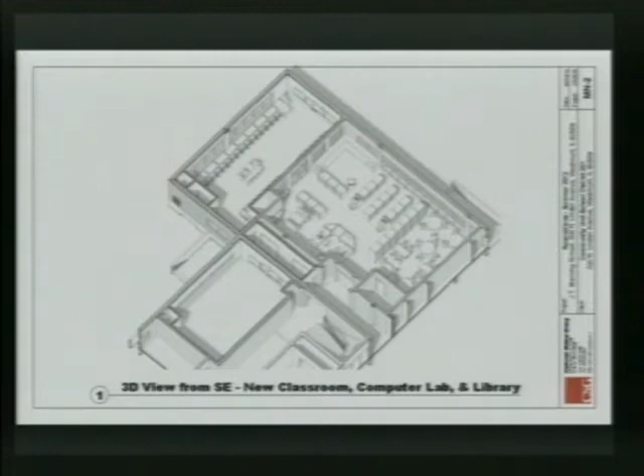I did have a couple of questions about that particular building. In the drawing, the handicap accessible piece, are we touching that? It almost looks like there's access from the library to the outside. That's the existing. So that exterior piece won't be touched?

No. We've actually been working with Mike to bring in some concrete restoration contractors to look at the underlying structure from the 60s. It has some spalling, so we're working with him to establish some numbers, and whether that's just a small project he takes care of or something we do later - that's the only thing.

I know that ramp has had some issues with the people who use it. That's why I was asking. Correct, that's not part of this project, but it's certainly a good issue as far as Manning accessibility in general, which is a big issue.

And I don't recall - is the office where the administration currently is, is that currently central air? There is a small residential unit that was basically put in there that is providing air conditioning for the two, from the superintendent to the business manager and the superintendent's secretary. There's one unit there, basically stuck in a storage room.

And then there is, in the corner of the classroom - you can see on the top left corner of the classroom where there's a closet - there's an existing air conditioning unit that serves the business office, and we're keeping that unit so that we can air condition that new classroom.

Would that be sufficient for the computers? No, it is not. It's in the wrong spot - basically in the middle, so it's in a terrible location, and it does not meet code. It doesn't bring in the amount of air that we have to. So if you look on the top left corner of the computer lab, there's a little spot that says mechanical. That's a new vertical univent that basically brings in outside air, we tie into the hot water and or the steam and electric, and we're able to basically heat and cool that space.

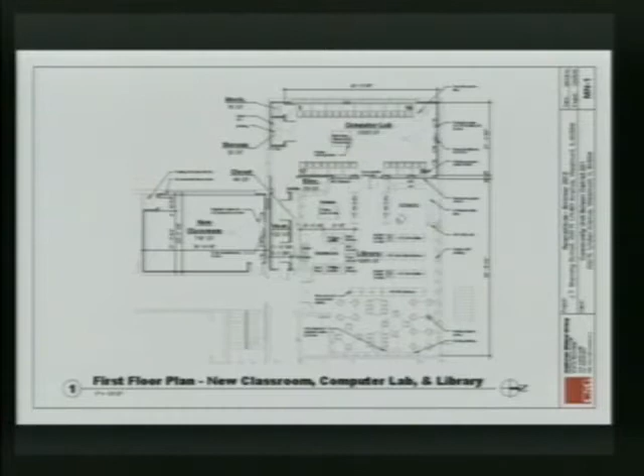This area on the left is where the existing stair is, and it runs to the far right, which is the 1960s addition. It's currently a special ed room, a computer lab, and a gifted area, and it's the original science area.

Along the outside wall there are enclosures around the steam radiators, about 6 to 8 inches. Then there's a base cabinet that's been abandoned in place. And in the rooms there are raised platforms from when it was a science lecture room or science lab.

It was originally 2 spaces: a long science lab running east and west with a platform for the teacher along the east wall, or the corridor wall, and the room to the north was a science lecture room with a platform on the south wall, back from when it was a junior high.

What we're envisioning here is basically demolishing the entire area. There's an existing non-load-bearing CMU wall that separates the original 2 spaces, and then a gypboard partition was put in at a later date that split the science lab into a couple of parts.

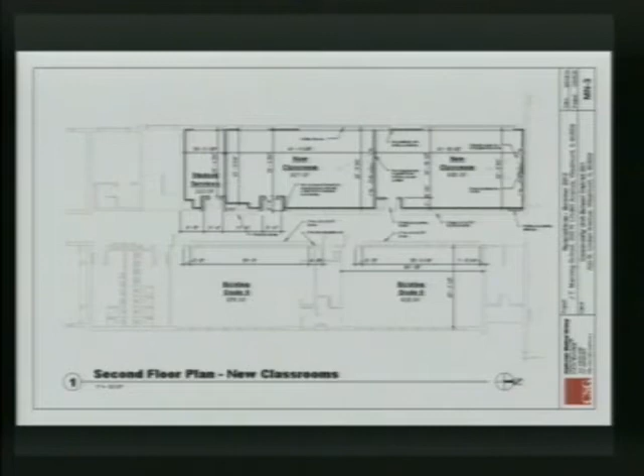In terms of critical path, there's some abatement work as well. Where is that abatement work? At this building, we have abatement work on both levels. The second level we're looking at right now, the platforms, we have asbestos tile underneath the carpet on the platforms. There's likely tile underneath the casework, and likely asbestos on the pipe insulation buried behind the casework. So this whole area is basically a project area where they'll go in and take a 2-week period of time to remove all those materials. So that's a 2-week upfront process.

On the administrative level, we also have some asbestos tile in the administrative area. I think if I remember correctly, the classroom is good, the window sills are positive, and there's tile in the administrative area. We're expecting we'll find some pipe insulation also. The ceiling tile in the library and the administrative area is clean. So we have basically 2 project areas at Manning.

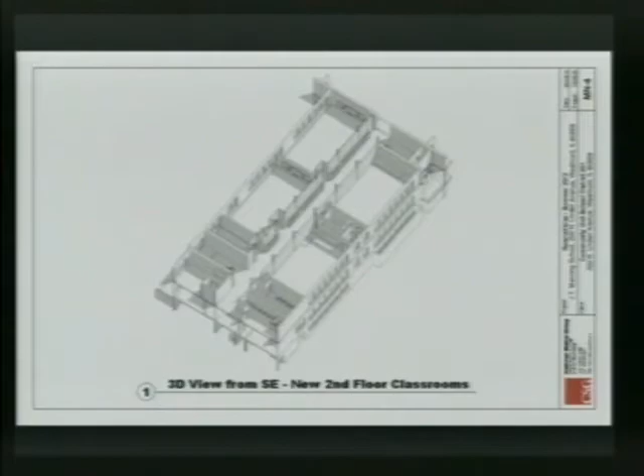When you say the first floor, you mean the one where I walk up the stairs to? No, the one that you walk down, the garden apartment level. Okay, very good. Yes, this end, and one reason this is a much better location for a kindergarten classroom is because of the grade of the site, this location is truly at grade. The kindergarten classroom does have direct exiting, which is recommended practice for all kindergarten, and it's actually ideal practice for even first grade classrooms to have direct exiting.

On the south end, we have the main electrical primaries that come into the site. Their exact location is unknown. The original drawings, when they showed building this, actually showed that they were building on top of them, which I hope they did not do, but it has been done.

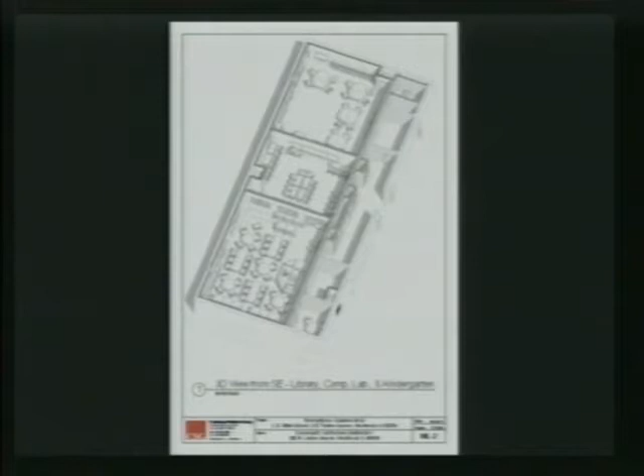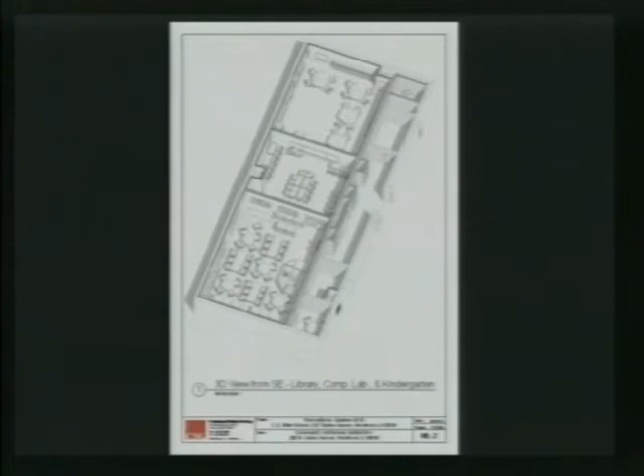Steve, don't we have some very nice accordion walls in these rooms right now? You have accordion walls, that's okay. I thought you had said they were at the time. Yeah, well, whether nice is the word or not. Accordions, we put one in at the junior high to basically close off the stage area. They're effective in closing a space, but acoustically they're very poor performers. I was just wondering if we'd be able to utilize them anywhere else in the district, or salvage them if they were in good shape. We haven't. That's a good idea, we could investigate that. We're going to have two of them that we could salvage. They function, they've been performing well for 40 years. Well, I mean, they work. You'd be surprised how few of those still work after this period of time. Accordion ones, especially because they're lightweight, tend to be more forgiving. I think people have taken good care of them. I'm sure Mike's done plenty of repairs on them, but they're the originals.

I have a question for you on that. I may not be understanding that space 100%, but I know on that most western piece of that building, it's all cinder block, and in that accordion area, the interior partitions are concrete block.

That room had some heating and air conditioning issues. It has electric heat and air conditioning. The unit ventilators are humongous. That's the best way to describe them.

In these concepts, as I described in the computer lab for Manning, we're replacing the 3 unit vents with vertical unit ventilators. If you've been over at the community room when that unit ventilator comes on, basically they are truly cheap mechanical units. They're inexpensive, that's why you see them a lot in schools, but they're very simple. There's a louver, there's a large squirrel cage fan, and that's it, and controls.

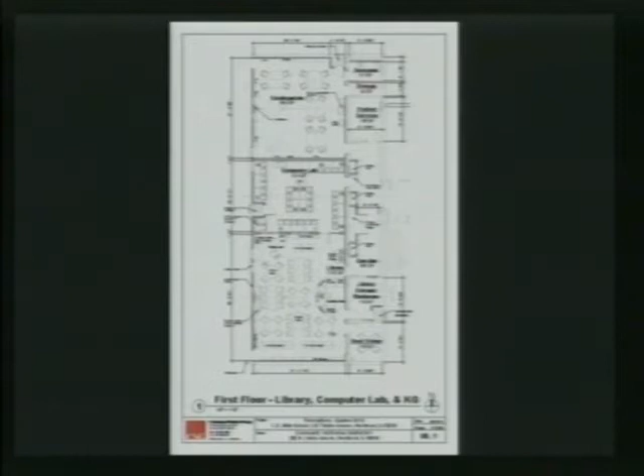And then basically the space - the north area, which is an IT room, there's a PTO room, a storage room - we're not really doing any work in those spaces, we're leaving those exactly the way they are. But basically from that north existing wall to the south, which is kind of a wide open space now, we're creating one room in the middle, which is kind of a meeting room for the school, which they're in need of.

Right now they meet right kind of almost in the principal's office. That space, if you're familiar with it, outside of the principal's office becomes kind of Grand Central Station. This would allow for meetings to take place without disrupting the principal's area. And then down where the existing windows are, we're creating a small break room, and at the north end, we have cabinets - it's a work area, basically for the school.

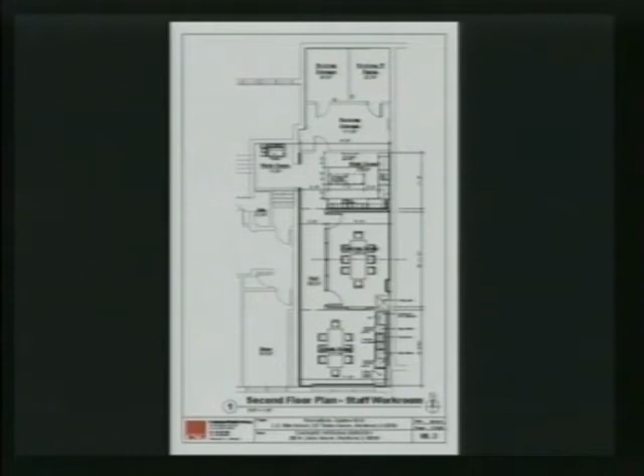This is a 3D view of the same area looking at it from the northwest. On your lower left, you can see basically the work area. There's an island and then basically perimeter cabinets, similar to what we did at the junior high, providing paper storage and the ability to lay out projects

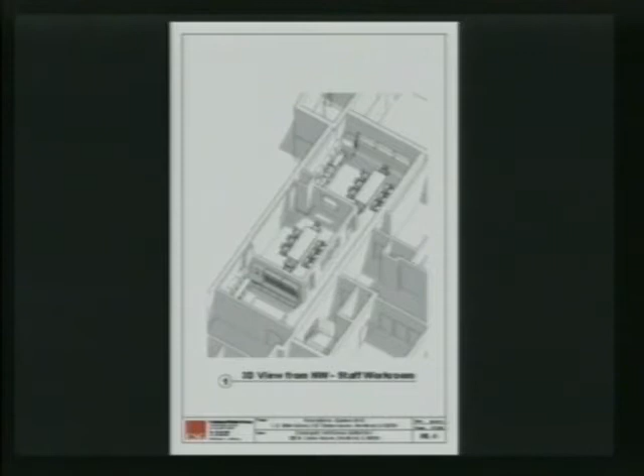and laminators and things like that. A small meeting space that's between the two, and then at the north end, some casework on one wall and basically a break area.

This next drawing is basically back to the first floor, and this is the current kindergarten classroom. If you remember, we were talking about if there's ever going to be an elevator at Miller to address accessibility, the area to the right of the door, if you're facing Miller from the street, is the most logical location where you can hit all 3 levels. Miller is kind of a split-level house, and unfortunately that would ultimately require you to cut 2 corridors, one on the lower level, one on the upper level, through that area to connect the floors.

So moving the kindergarten allows that to happen in the future. Basically what we're showing here in the short term is taking that current kindergarten space and creating 3 simple offices out of it, for student services, speech, ESL, whatever needs made most sense to be in that space. They're basically each a third of that space.

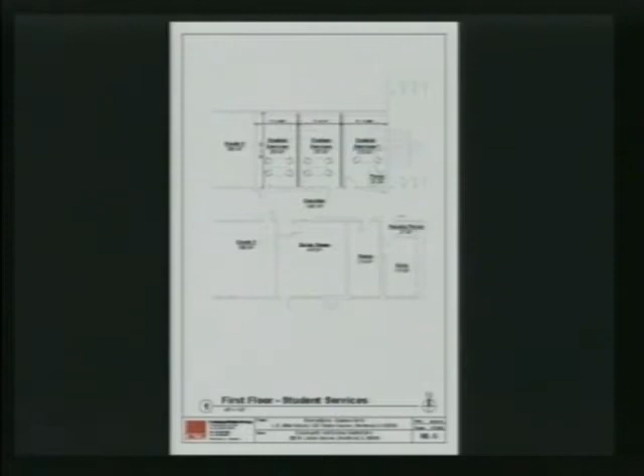What's directly above that? So you would say if we were to put an elevator in at some point, it would go in this student services one where the bathroom is? Correct, yeah, on that far end. So you'd imagine you'd lose 7 to 8 feet of width there.

And then above, there's a classroom. How would that impact the classroom above? Same thing, we'd lose a section of that classroom and likely want to look at that whole stretch of area and see if we can re-subdivide the classrooms to maintain proper size.

The walls that run north and south separating classrooms are non-load bearing, so that's a benefit, but we definitely would want to look at doing something, possibly right now.

It's amazing how often it changes, but I know over on the north side, second floor on the west end, there used to be some student services being provided in that old classroom space. Possibly that could move to the east end and that could become a standard classroom.

Steve, just curious, this looks like a wonderful area here. Why aren't we doing the same thing with the one empty classroom that Diane was talking about on the other end at Manning, where I think it's the early childhood or the Head Start is now? We certainly could. It just was not on our charge, but it's something we could certainly look at.

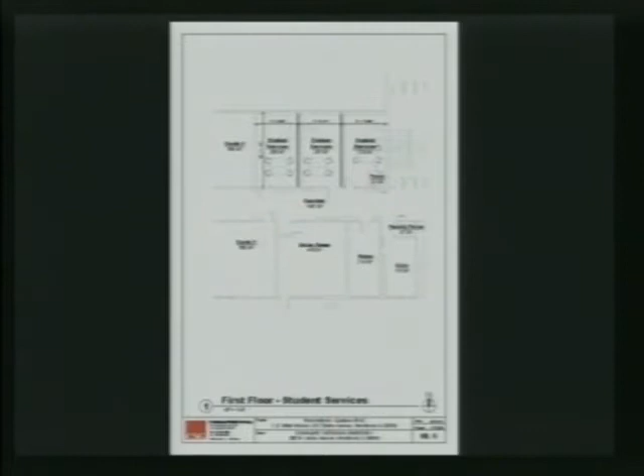Okay, so now we move further north in the town to the high school.

I have to say, this is one of the most interesting projects I've worked on for you, where usually when Mike and I are walking around and interrupting people, they're not too happy to see us. This is not the case when it came to talking about windows at the high school. I think for the amount of money you're spending, this will probably be the biggest bang for the buck that you're going to spend. It's really interesting.

Obviously everyone knows natural light is a really important part for learning, for workspaces. Everybody would rather have a window looking at anything, a wall, into an old light well. It's better. You combine the lack of windows with a curvilinear form, it's a very disorienting building. I really think this is going to be a huge step forward.

What we've done, you can kind of see the darker spots around here are windows, and I'll show you a little more detail later, but we went through and looked at locations, where could we put them in today in an orderly fashion that would serve the current spaces, but would allow you to potentially re-subdivide the interior space. Because you have some really large spaces at the high school, bigger than they truly need to be, and if in the future you looked at, say, enclosing this classroom, you'll be able to create net new space. So we basically followed the structural column grid of the building.

There are pairs of 6 foot tall by 4 foot wide, what are called fixed over project-out windows. It's an insulated aluminum window, it has tinted low-E glass, and the lower 2 foot section of it is an awning window. It has a restrictor so someone can't climb in or climb out of it, but it allows you to get some ventilation, and we're showing those in most locations.

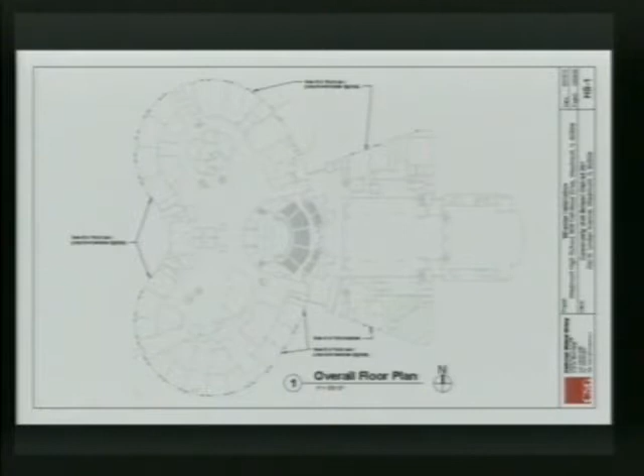If you're familiar with those open areas, if you walk around the south portion of the plan, they had these classroom zones, then a fixed window and an exit door perpendicular to you. Mike and I, when we were looking at the outside of the building, were looking at that and going, do we want to put them in there or not? When you go inside, it really doesn't, because you can't see the window, give you much - there's a little natural light coming in, but it's not a big benefit.

So we initially had them in the drawing, Mike and I walked through, took them out, but then when we walked further, we said we should really put those in, especially thinking forward to whatever you do with that building, it will give you more options, because someone will be able to see, whether it's night or day, they'll have an idea.

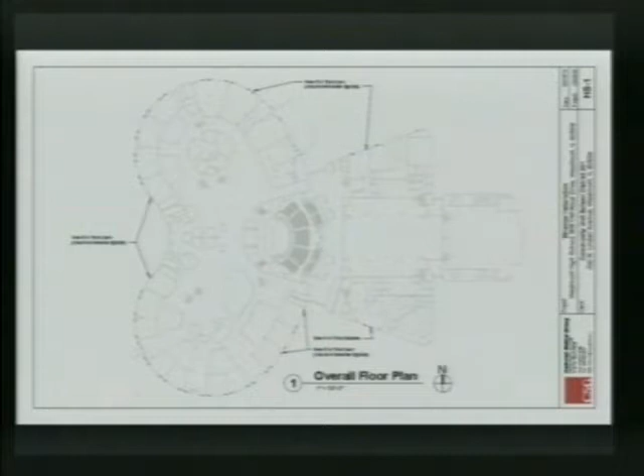Building security, I think, is going to improve, because now you literally can see what's going on outside the building from all these spaces with adults in them. So if some activity was happening, or after school somebody was goofing around, the chance of them being seen by a staff member and reacting will be better.

So it's going to be really exciting to see how this affects the high school. I think it's going to be a great project.

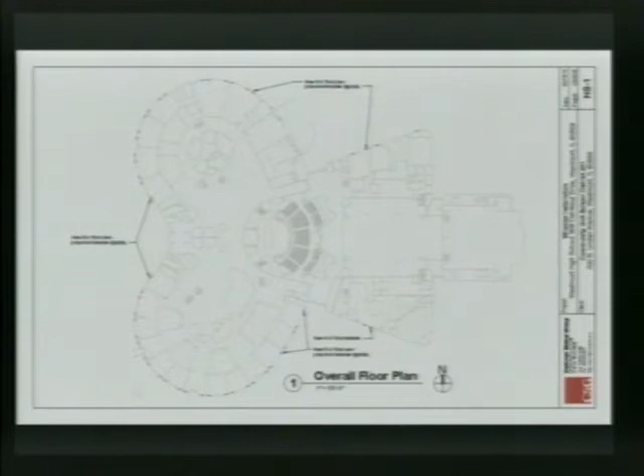I appreciate the rendering, because I wasn't sure what to expect. I didn't expect them to be this big.

We basically started at 5 foot 4 inches. We were down at one point going, should we go 2 foot 8 inches? And then we really felt, especially after talking with a mason who helped us do the cost estimating to cut all those openings, he said we could easily put a 4-foot opening in there.

And I do think they'll be nice. Like at Miller on the west end, they have those narrow strip windows - these will be wider than those, but approximately the width of a single sash at Manning. Those classrooms with a series of windows are probably between 3.5 and 4 foot wide. So I think it's going to be nice.

And the rendering's crude, but when I was talking about this with Kim and Kevin, they thought if you can come up with something, it'll just help to visualize what this is going to look like.

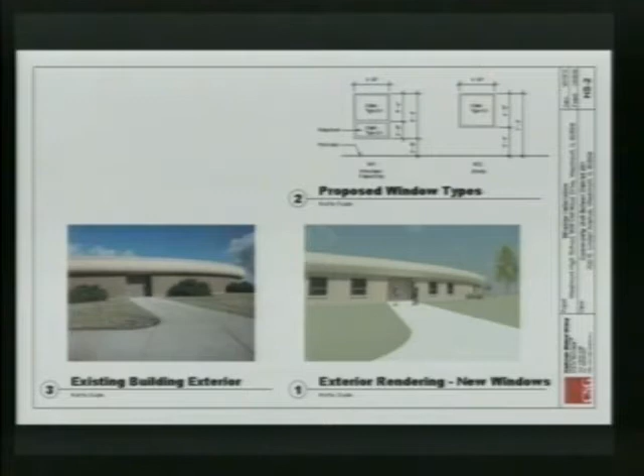Thank you. Sure. Okay, so now we're headed across the tracks to South School, and this is an overall plan of the first floor. Basically, we're not doing really much of anything other than painting and cleaning up the basement level.

It's early on, especially when we were talking with Marker, we were going to have to look more extensively at that because we're going to need that square footage. It's a large meeting space. It's valuable. It was valuable when South School was open, and we think it will have a lot of value both for the administration and for any type of student use on the north part of the school. It's another space they could use for meetings.

Linda thought it would have benefit for different types of screenings, functions like that. So I don't have that plan here because really we weren't changing anything down there. We're doing just some cleaning up of that area. You mean downstairs? Downstairs, yes. Yeah, the basement level, not the north section.

On the north section, on the left-hand side, basically in the top northwest corner, we're taking that classroom and the classroom to the south and cleaning up those spaces, basically coming in and painting, making sure we have the right data and telecom that we need, to make those spaces appropriate for about a 1 year period of time for the early childhood and First Start program. So we're basically working on those two areas.

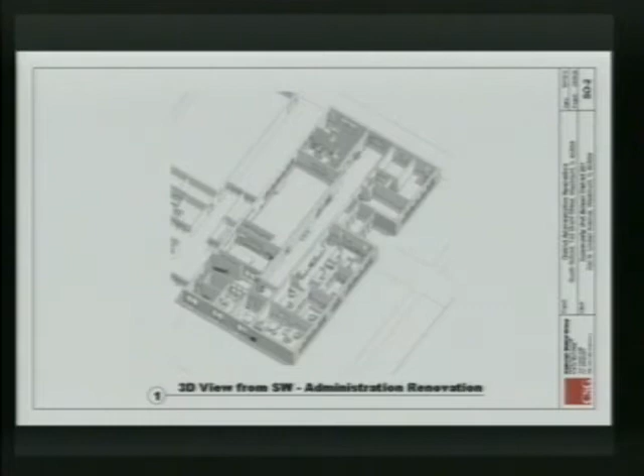The current idea is that they would be using the 3 classrooms on the north section of the school, starting from that early childhood classroom going to the east, and part of the gymnasium on a temporary basis from the first week of June this year until likely around Thanksgiving, when they could move into the renovated area.

So they would move over here temporarily. We would likely just be sharing space. We're looking at possibly subdividing one of them so there could be some privacy. That would be a temporary home, and then they would move up to the upper level.

Looking at abatement going to the third week of August, if we're talking August 1st start, then we'd be looking at probably about the third week of August that we'd be able to have the general contractor start. So the way we envision it, they would be working at the high school, Miller and Manning, get substantial completion at those 3, and then they would focus their attention on South.

And the question is, would the abatement be complete by the time the first bell rings in the fall, in August? That's actually how we have it currently scheduled. Because I thought we worked out that date with Camplin Environmental so that they felt they could start.

At South, there's basically 2 main abatement areas, if I remember correctly. The southwest corner, which is the original 1920s portion, there's asbestos under the carpet and asbestos tile above the acoustic panel ceiling. And then basically above what was the library area, there's asbestos above there.

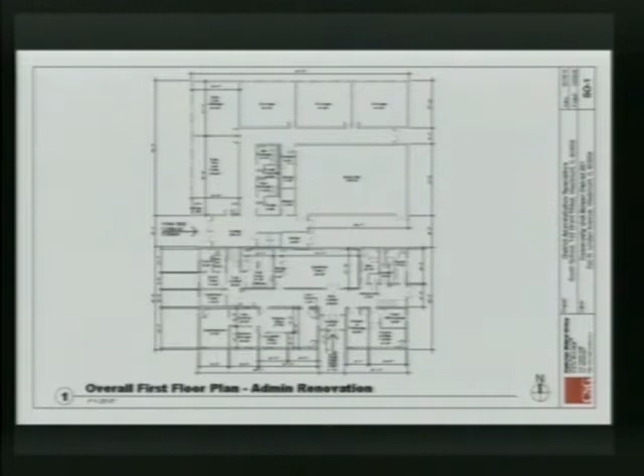Okay, this is basically a 15-page cost estimate that's based on, the previous one, we had to rely a lot on guesstimate square foot costs and everything because we didn't have a design that was developed enough to truly do takeoffs of doors, other than assuming a certain number of doors. So this is based on takeoffs.

We worked on this, our firm together with Executive Construction Inc., a large general contractor and construction manager who helped us prepare the previous estimates. And then it's been a work in process. God knows how many revisions we've made to this thing, but it's a constant refining tool where we develop it, then look back at it, double check quantities, and make sure we're not carrying something twice or being too conservative.

Our hope is that these are conservative numbers, so once we competitively bid this in what's quite a competitive bidding environment, our hope is we'll come in below these numbers. Cost estimating is really kind of an art because you want to try to get the glass just about half full, half empty, and not be overly conservative or miss something. Usually what happens is you want to win the war, but sometimes you win battles and lose battles.

What's always interesting is when we actually open up bids, we'll compare where the line items came in from the bids to what we estimated. Some cases we might be low on electrical but got great numbers on mechanical, and they wash each other out. We went through this in detail with our engineers and contractors, and solicited subcontractor input on specific trades to make sure they felt what we were carrying was correct. As late as last night we were getting additional cost estimate information in.